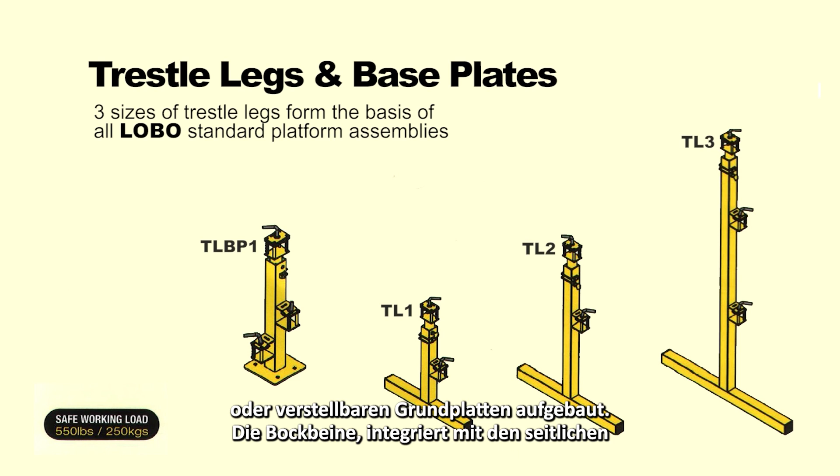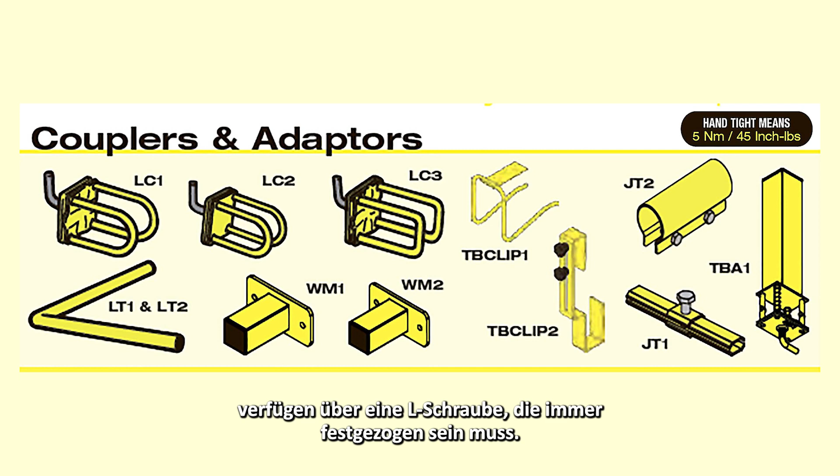The LOBO system is built on 3 different sized trestle legs or adjustable base plates. Trestle legs incorporating side clamps and top clamps together with round steel tube and low band couplers form the basic elements of the system. The low band coupler and all other LOBO clamps feature an L bolt which must always be tight.

The 3 sizes of trestle legs and the adjustable base plate connect together to form a modular and scalable access platform system. Remove the height adjustment pin and raise the insert of the LOBO trestle legs. Always remember to reinsert the pin and tighten the thumb screw.

The welded side clamps are set at predefined positions and all line up to allow total integration of all LOBO systems trestle legs, base plates and round tube.

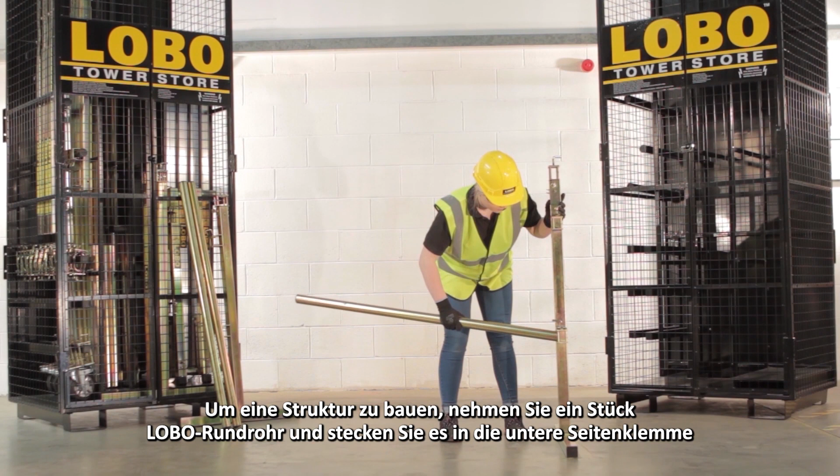To build any structure using a trestle leg or base plate, take a length of LOBO round tube and insert it into the lower side clamp and tighten. Always start at the lower side clamp. Take the second leg and repeat the procedure, ensuring you use the lower side clamp first to allow the round tube to square up to the leg. Wherever there are adjacent side clamps, add more round tube to form the next load-bearing level.

These 3 tubes form the load-bearing levels on the system as they are all supported by a welded side or top clamp.

The round tube can be raised to provide handrails as required by removing the height adjustment pin. Always fully reinsert the pin and tighten the thumb screw.

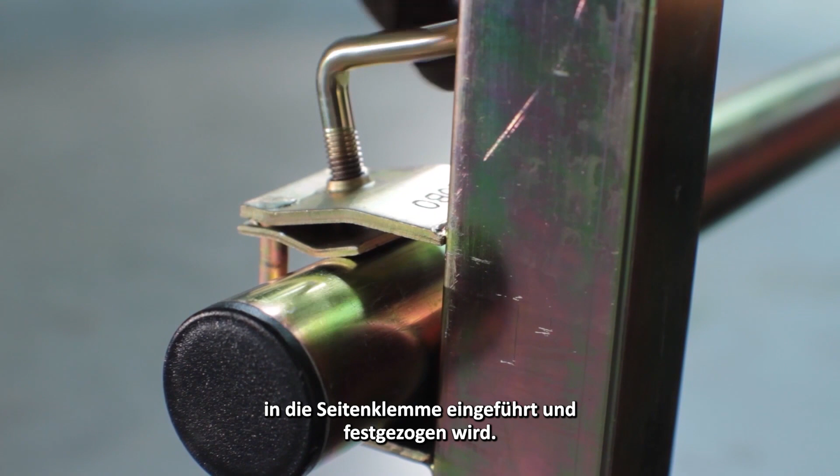Here we can see how the round tube is inserted into the side clamp and tightened.

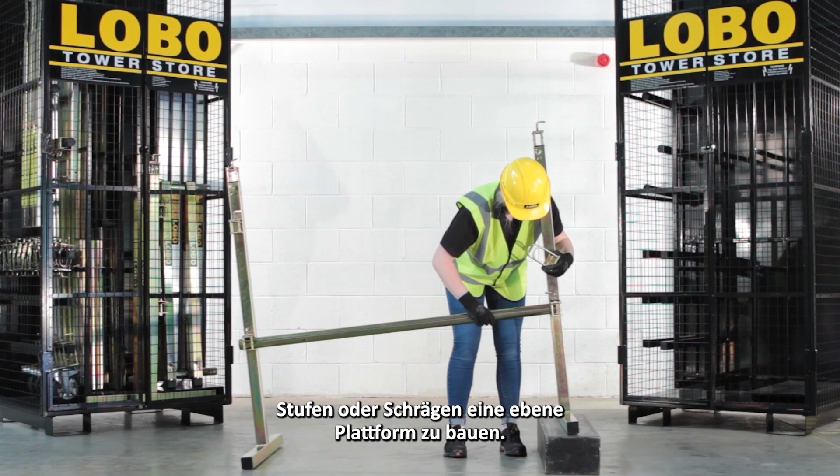It is possible to build a level platform on uneven surfaces, plinths, steps or slopes by using the low band coupler. There are a number of ways the LOBO system can be configured over a step or on a slope. For example, using the low band coupler, which is not load bearing, set the round tube height to provide a level round tube as shown.

Fully tighten the low band coupler and ensure the trestle legs are vertical. Never use the low band for load-bearing purposes. For example, in this case, only the tube at the top is load-bearing as it sits inside the top clamp.

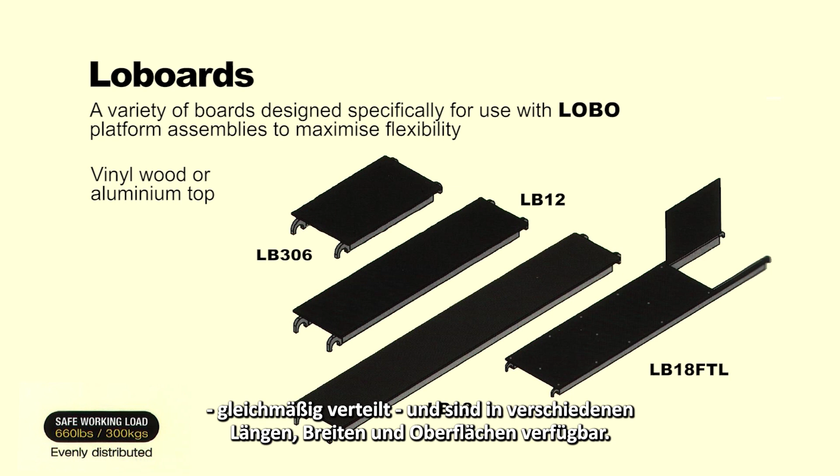LOBO Systems Loboards are all rated at 300 kg safe working load, uniformly distributed, and they come in a variety of lengths, widths and top surfaces. A hatchway door option is also available.

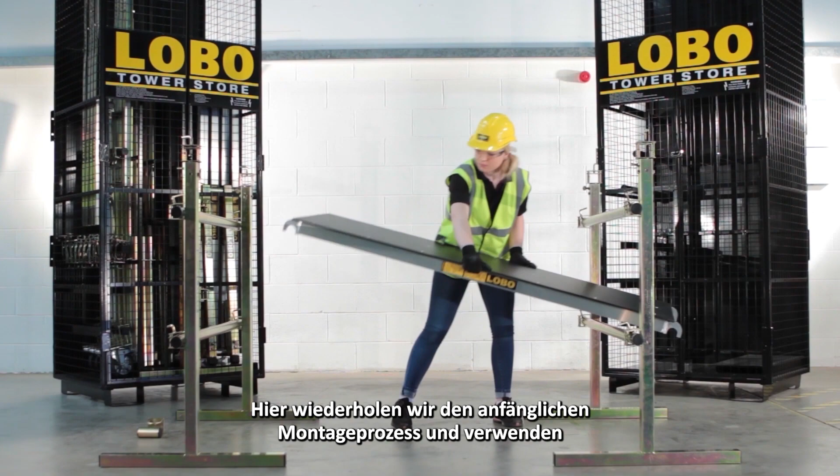Here we repeat the initial assembly process and use more trestle legs to produce a second trestle configuration. Any Loboard size can be used to suit the requirement.

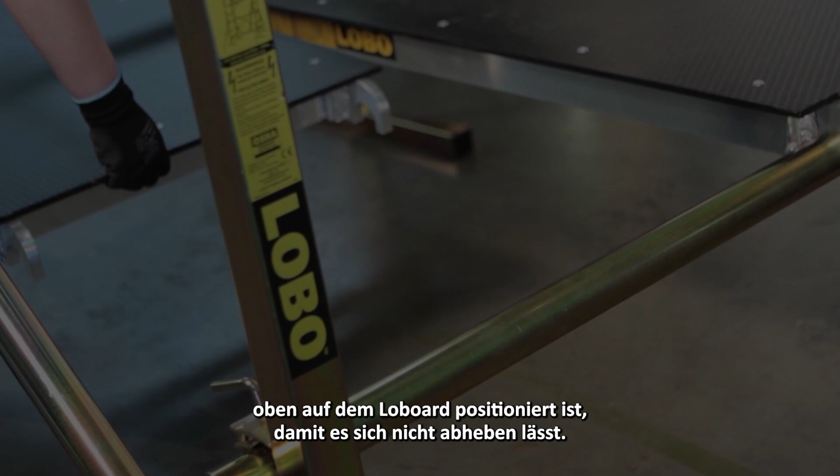Loboards are designed to fit end to end, enabling a raised walkway or ramp to be constructed. As they interlock, Loboards cannot be lifted individually.

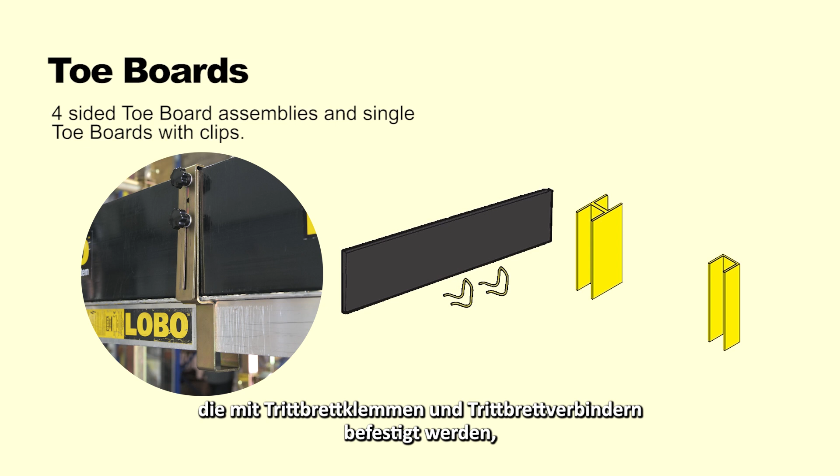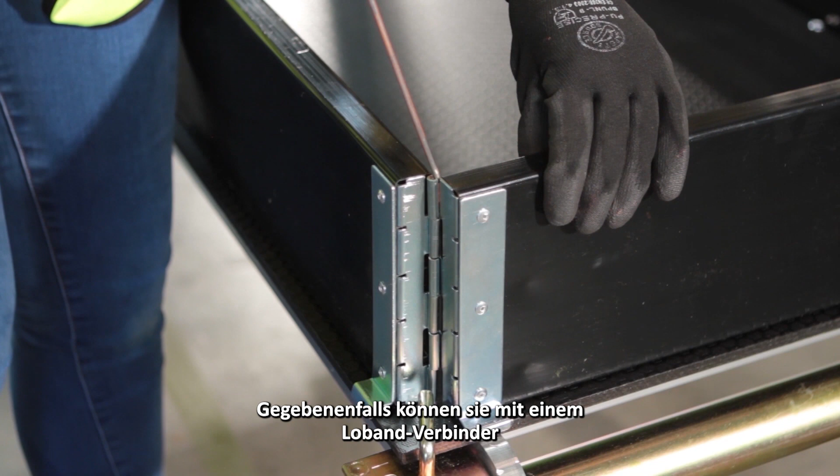Toe boards. There are two types of toe boards: individual toe board pieces, which are fitted with toe board clips, and joiners to form corners and hinges which wrap around the edge of the Loboard. These are fitted by opening them out over the Loboard perimeter. They can be fixed down with a Loband coupler and a small round tube if required.

Handrail round tubes. Round tubes should be fitted at every standing height using Loband couplers to form handrails. Tubes should, wherever possible, be fitted on top of the load-bearing tube and secured with Loband couplers. This means the tube can then be load-bearing. The tube can be positioned exactly where needed and the Lobands tightened to secure in place.

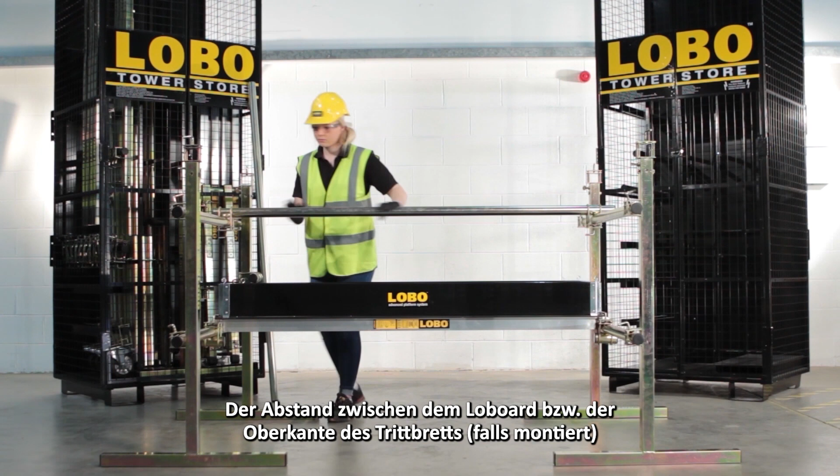The gap between the Loboard or the top of the toe board, if fitted, and the intermediate handrail round tube should be no more than 470 mm. The gap between the intermediate handrail and the top handrail should be no more than 470 mm, with the top handrail tube set at 1 metre from the Loboard.

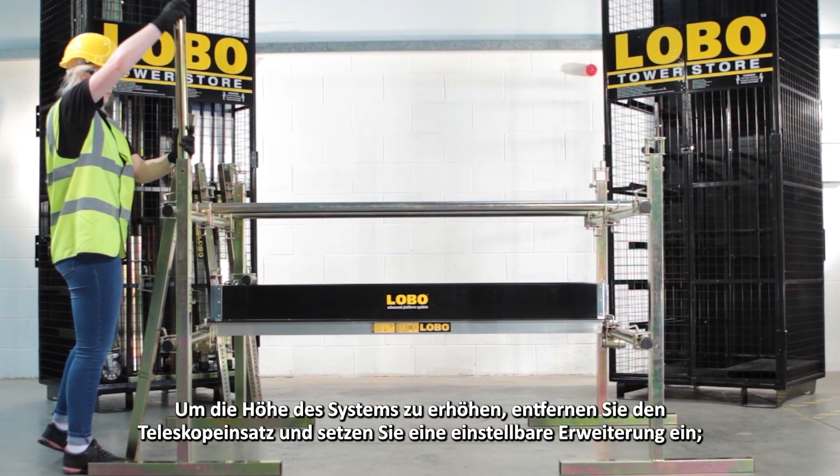Adjustable extensions. To increase the system height, remove the telescopic insert and insert an adjustable extension. This can then be raised to the required height. Reinsert the pin and tighten the thumb screw to remove any movement.

Adjustable extensions can be fitted to any trestle leg or base plate by removing the inserts and reinserting it into the top of the adjustable extension. The adjustable extension can be positioned back into the leg or base plate to the correct height by inserting the pin and tightening the thumb screw.

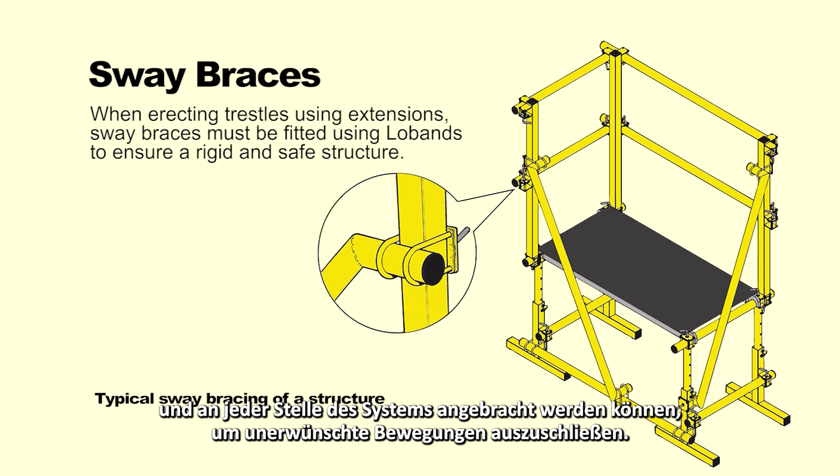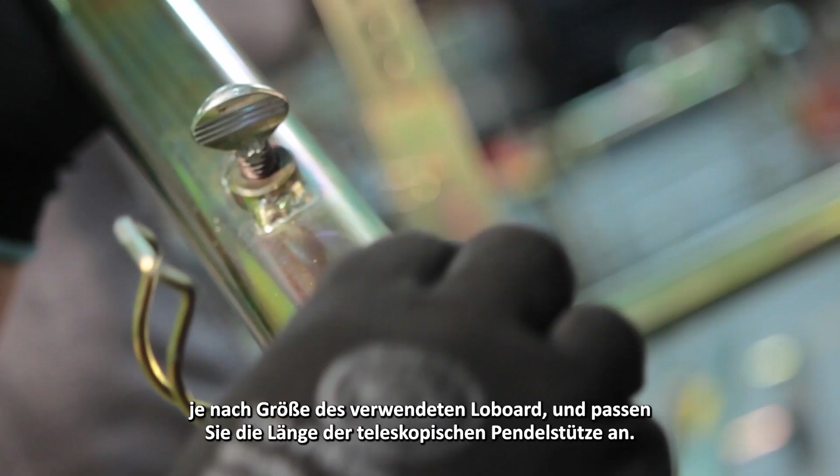Select the correct length from a choice of 3, depending on the size of LOBO board in use, and adjust the telescopic sway brace length to fit. Reinsert the pin and tighten the thumb screw to lock in place. Use LOBO band couplers to secure the sway brace. The sway brace can be moved to the optimum position.

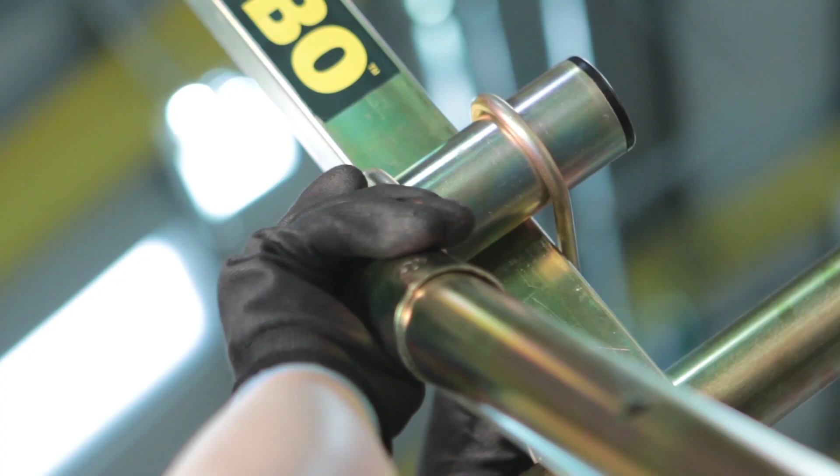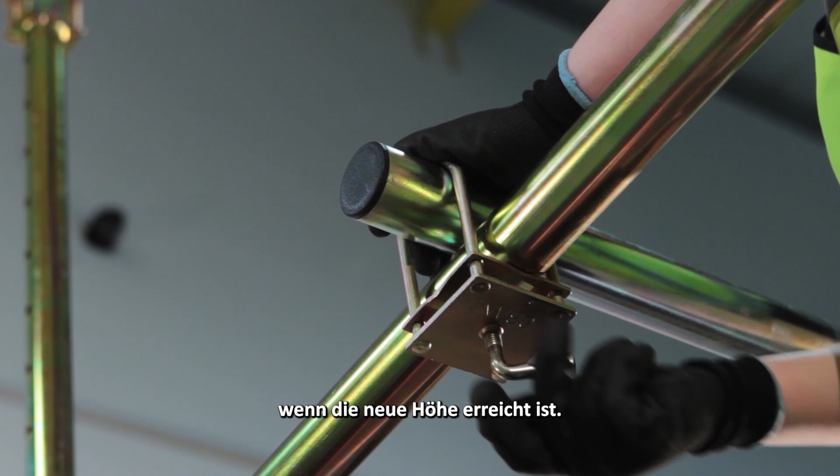Handrails can be fitted above the current working height to ensure safety when an elevated height is being constructed. The advanced handrail construction process provides additional protection when the new height is reached. Always ensure the LOBO band L bolt is tight and position the tube on top of a load-bearing tube whenever possible.

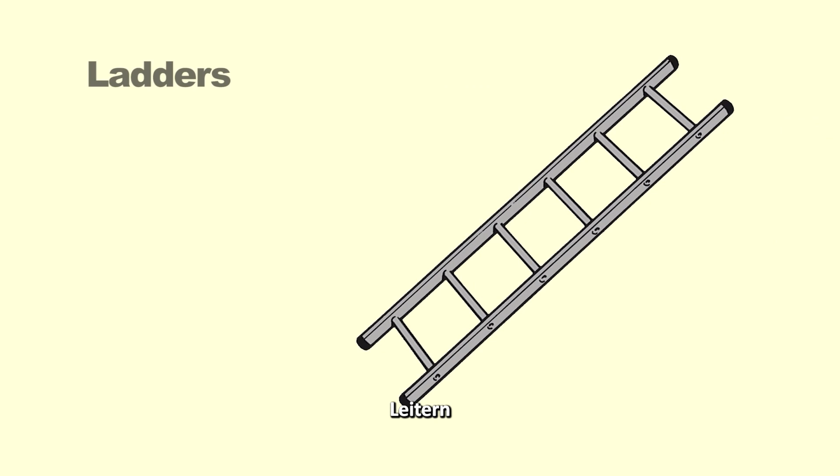Ladders can be secured to round tube anywhere on the system using LOBO ladder clamps. Always use at least 2 and ensure the L bolts are tight.

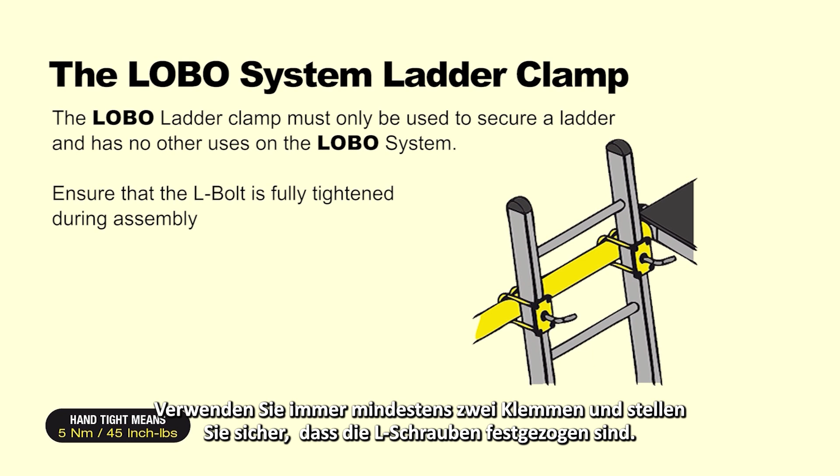LOBO Advanced Handrail System. The LOBO system allows handrails to be fitted above working height from a lower position of safety, so that the trained user should never be exposed to the risk of a fall. To construct the next level, insert extensions and tube accordingly.

Ladders come in a variety of lengths and can be fitted from a position of safety using 2 LOBO ladder clamps at the top of the ladder. If the ladder needs to be vertical, 2 more clamps can be used to secure the bottom. Always ensure the ladder clamps and side clamps are tight and secure.

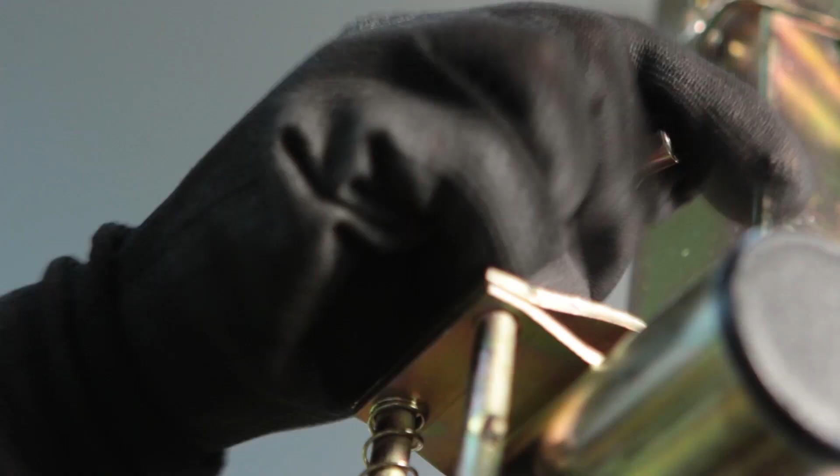Outriggers are used to increase the platform footprint of a structure, thus ensuring it always complies with the 3:1 height to base ratio rule. Outriggers should always be used to provide stability to taller systems and should be fitted all around a structure. 2 LOBO bands are required to fit each outrigger.

To fit the outrigger, secure the bottom of the outrigger to the leg using a LOBO band. Secure the top to the leg with another LOBO band.

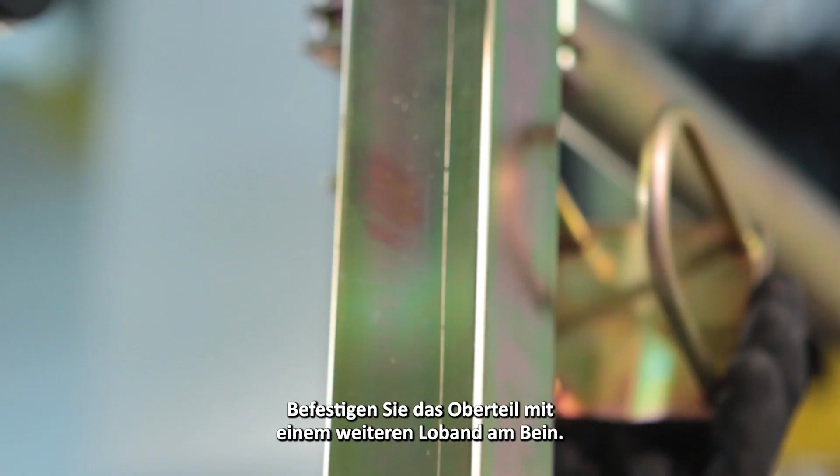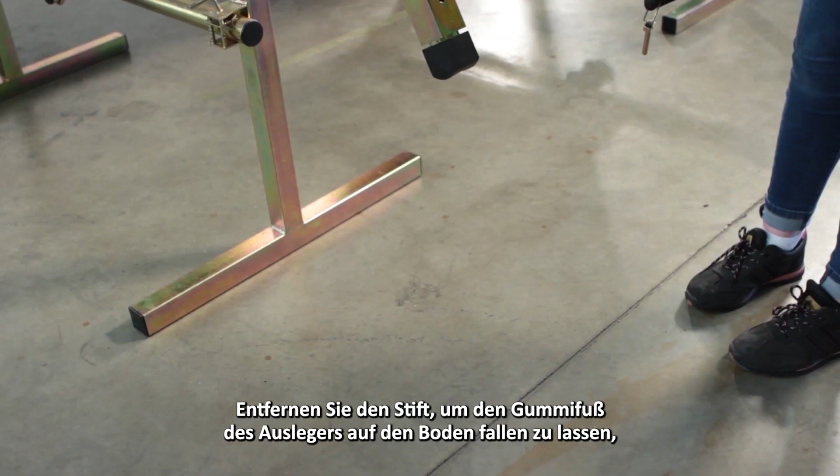Remove the pin to drop the outrigger rubber foot to the floor, reinsert the pin and tighten the thumb screw. Loosen the Lobands to adjust down on the floor, then tighten to secure.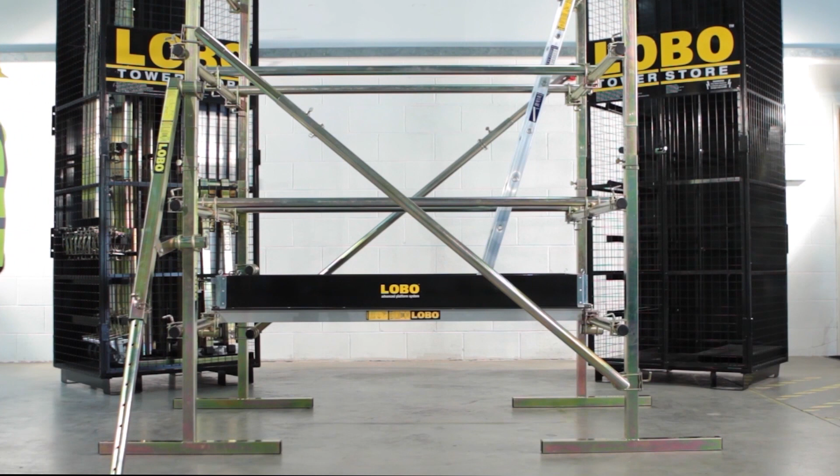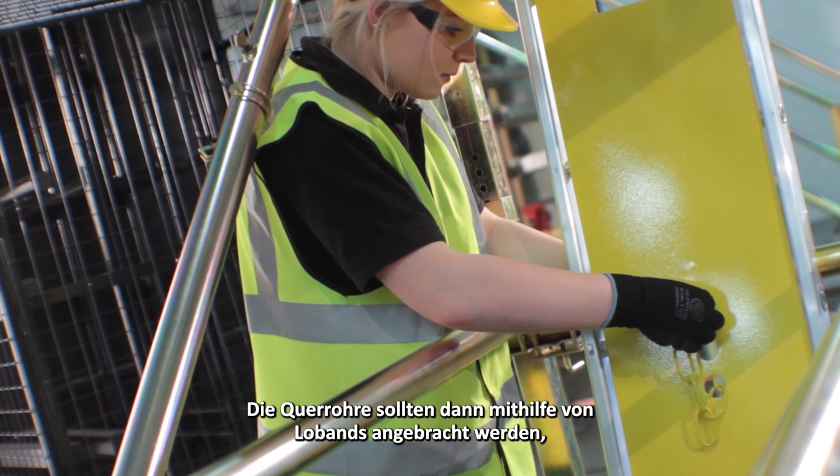Ladder guards. The LOBO ladder guard comes complete with a padlock and is secured from behind using the chain. When using low boards with hatchways, require the ladder to be on the outside of the tube. Cross tubing should then be fitted using LOBANDs to complete the handrail enclosure around the low board from a position of safety. Low boards can be fitted to the next level and adjustable extensions form handrail verticals.

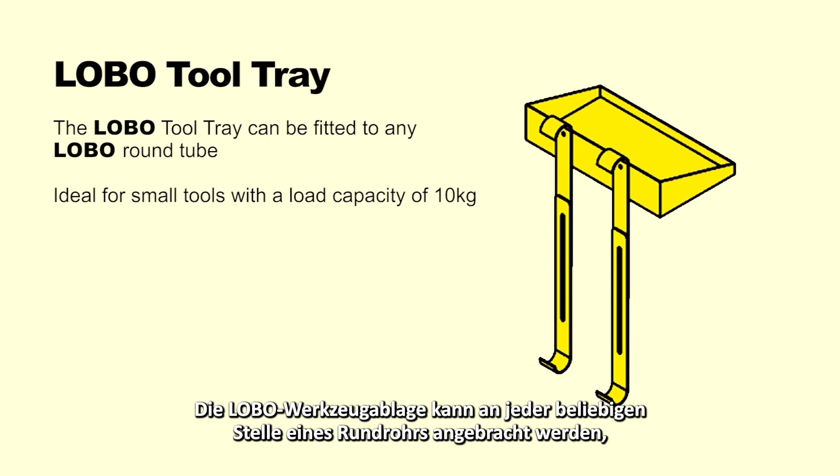Tool tray. The LOBO tool tray can be fitted anywhere on round tube to provide a convenient shelf when working on the platform. The brackets are designed to adjust to ensure a secure fit.

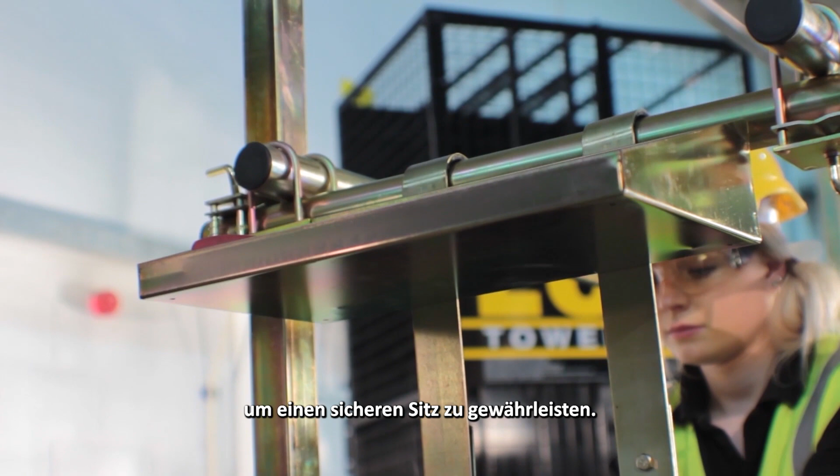Lifting slider beam. The LOBO System's lifting frame can be assembled using any size of LOBO trestle legs and adjustable sway braces.

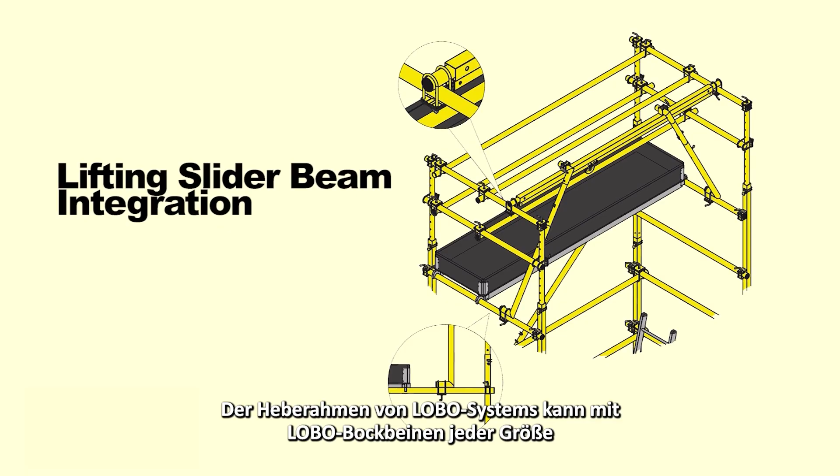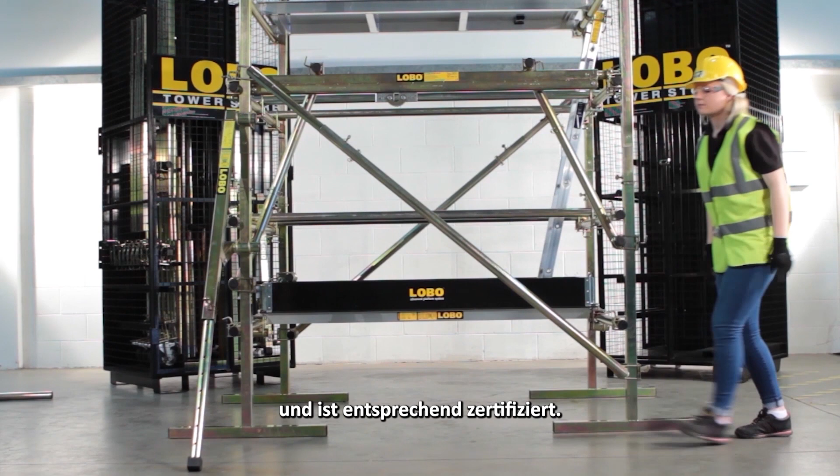LOBO beams can be integrated into the LOBO system. There are 5 different lengths to correspond with 5 low board lengths. Insert the lifting slider beam into the top clamps and raise to the required height using the adjustable sway braces, fitting using LOBANDs to ensure the system is rigid.

Outriggers and extensions can also be used to stabilise and increase the lifting height of the frame. Load calculations and stability assessments must be performed each time the beam is used. This ensures overloading and instability does not occur.

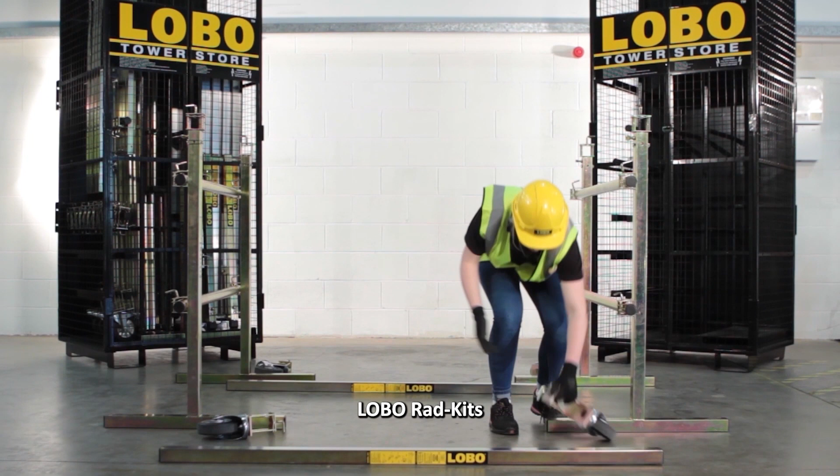Wheel kits. Wheel kits are available for systems on trestle legs and base plates and come in different sizes to correspond with the low board length.

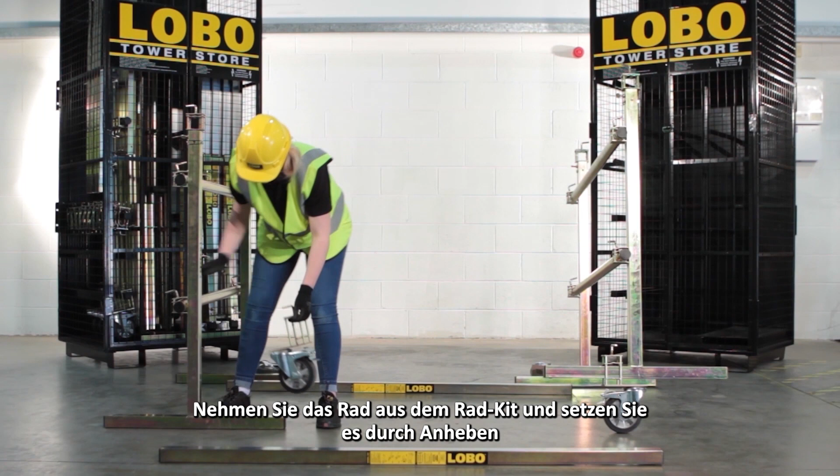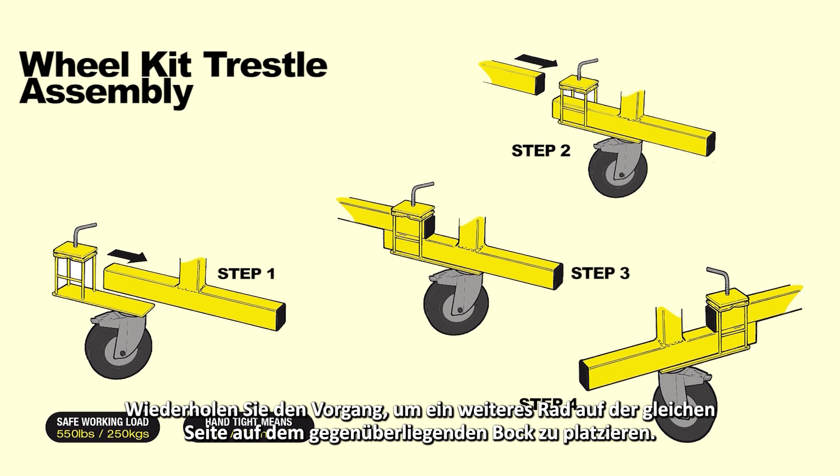Remove the wheel from the wheel kit and, by lifting the trestle leg, insert it onto the foot of the trestle. Repeat to place an additional wheel on the same side on the opposite trestle. Take the connecting square tube and insert it into one of the wheel top clamps to secure the wheel in place. Tighten the L bolt.

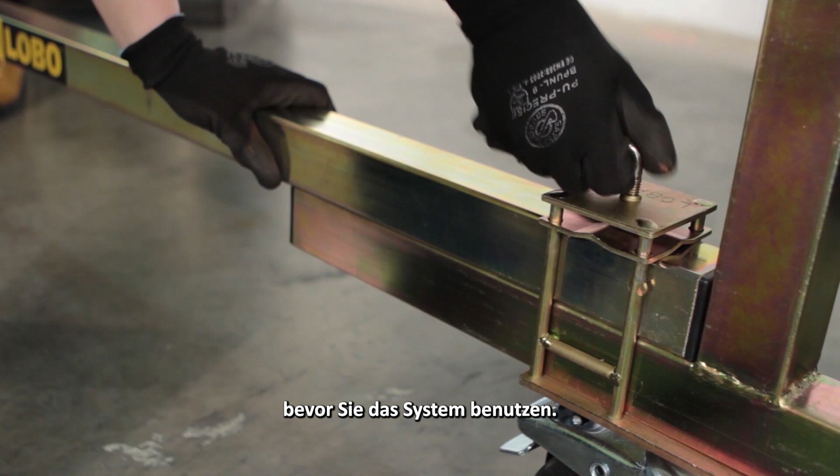Repeat the procedure for the 2 legs on the other side. Fully tighten all L bolts once the LOBO board has been refitted and always ensure the brakes are fully applied before using the system. If the system has been built square and straight, the LOBO board should slide easily around the tubes.

LOBO gate. The LOBO gate is fitted using 3 LOBO couplers, 2 to form hinges and the 3rd to form a stop position on the opposite side to the hinges.

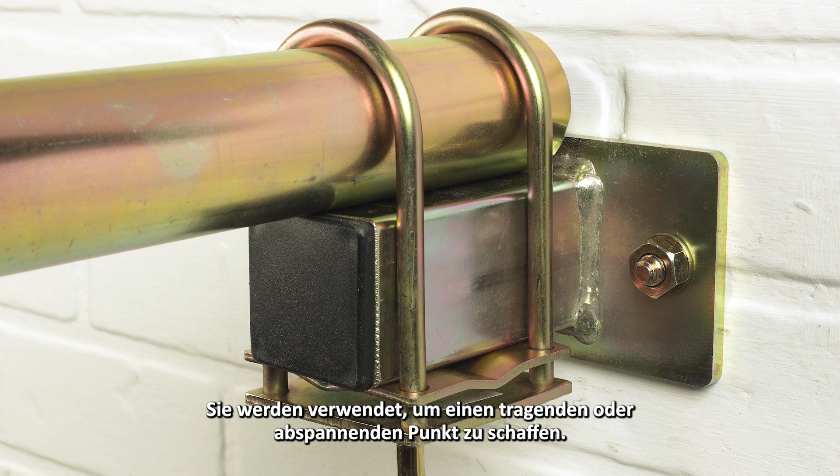Wall mount. WM1 is for tubes. They are used to create a load-bearing or tie-off point. It needs to be suitably secured to a structure and should be fitted to bear the appropriate loading.

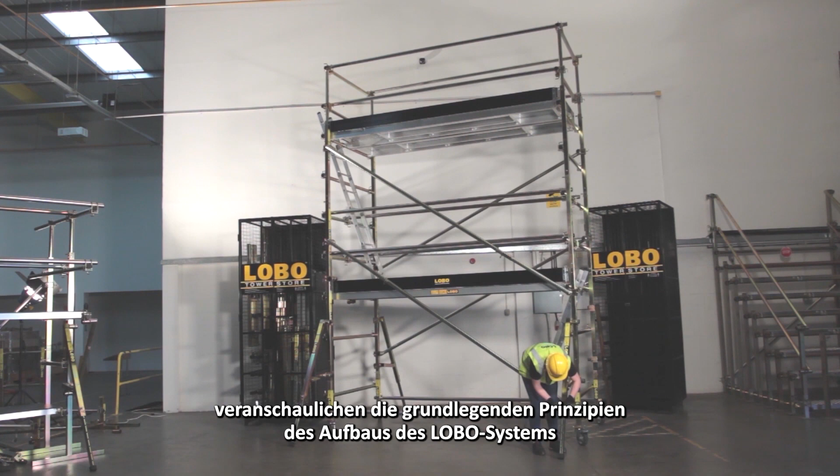The information provided in this short film illustrates the basic principles of how to assemble the LOBO system and identifies some of its more popular components. The configurations that can be built and the potential of the system is limited only by the imagination.

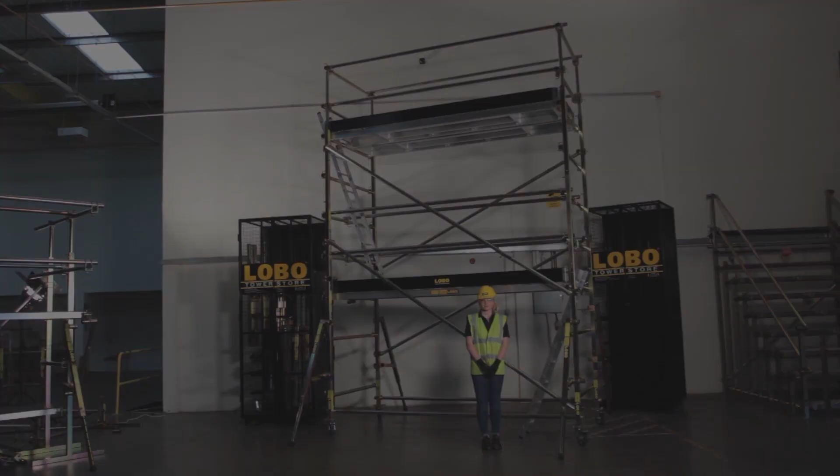For your own safety, please always remember the following points. 1. Anyone building or using the LOBO system should undertake the LOBO course and be trained and certified by an authorised LOBO trainer.

2. Always read the instructions before assembling and using the LOBO system and consult the system catalogue if necessary. 3. Always ensure the system is safe and secure before using it.

4. Always ensure that all clamps are fully tightened and secure before use. 5. Pack away all component parts properly after use.